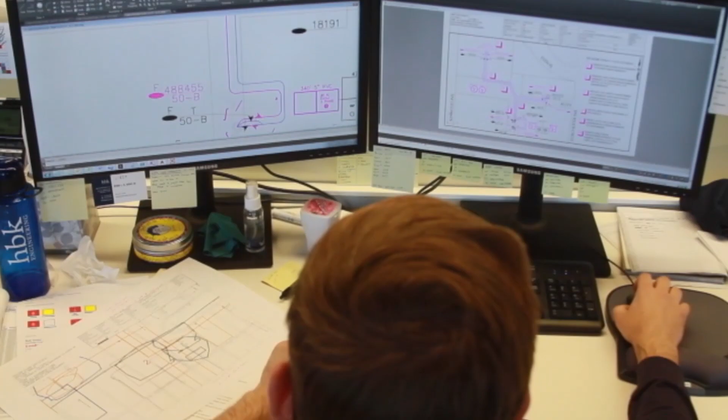Nobody can prevent damages on their own. In every step of the design, installation, protection, and maintenance of underground utilities, there are people working diligently and innovatively to reduce damages. All these people need and deserve to have their stories told, which is what we do here at Planet Underground TV.

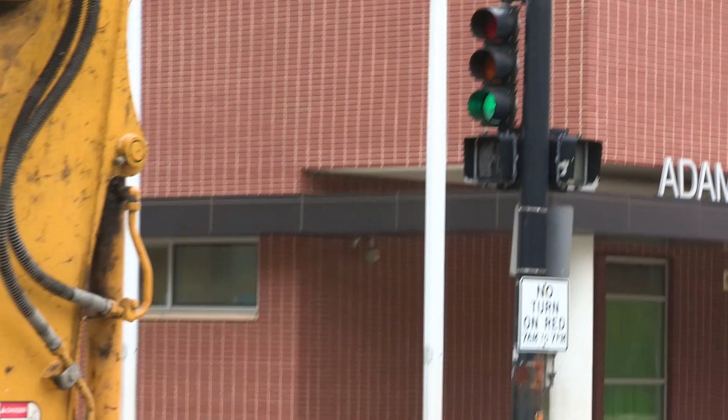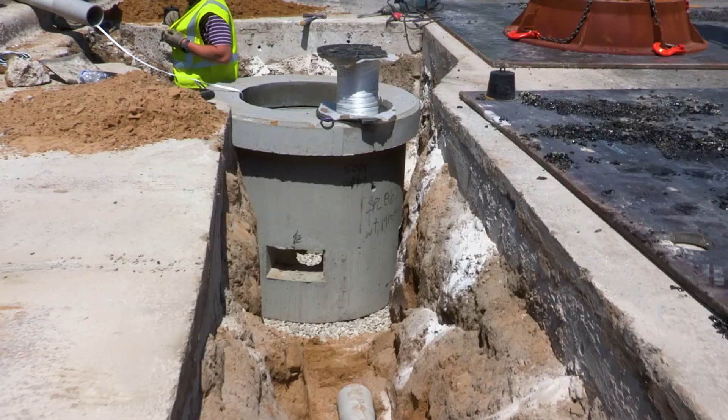We're out here at 75th and South Shore Drive. We're doing some trenching. We're going around some fire hydrants that needed to be avoided for the bore shot, so our trench involves going out in the South Shore. So we saw cut yesterday, and today we're actually digging all the road. My pipe's getting stubbed under the curb line where they're actually going to be doing some bore shots, our 1 4-inch pipe that we're putting in.

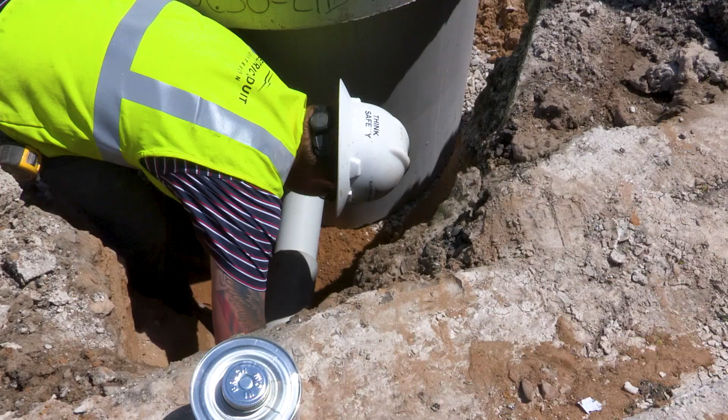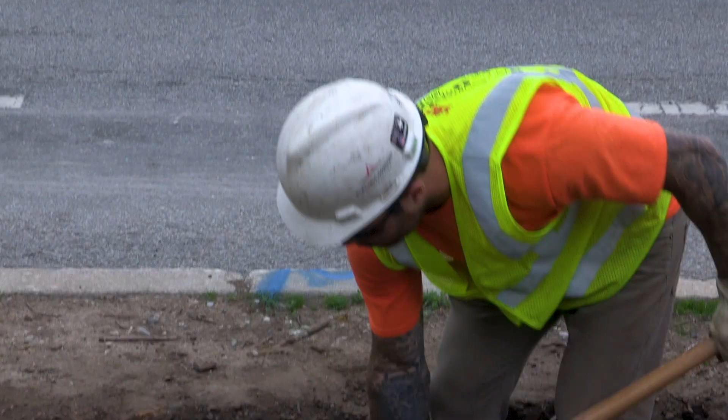So I'll stub my pipe into a pit for the bore crew, and the bore crews will come out and drill theirs in and eventually tie into ours. With the drilling though, they have a lot of potholing to do due to the water services going to all the residents here. And they will be potholing every water service that the drill crew will be drilling either under or over, depending on the depth of those water services.

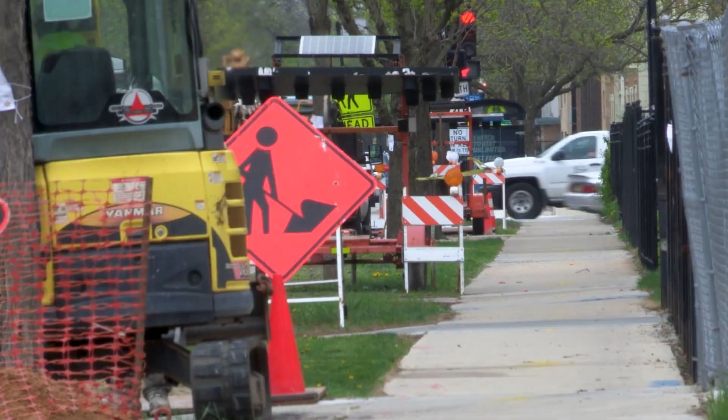So this job is for small cell nodes. There's actually a pole that was put up a few weeks ago by one of our local 9 crews at 74th Street, which is right over here. And our conduit will end up connecting into that pole for the small cell nodes, actually running all the way from 72nd all the way down to 76th, I believe. But there are numerous poles that went in for new small cell nodes and numerous manholes for the fiber build.

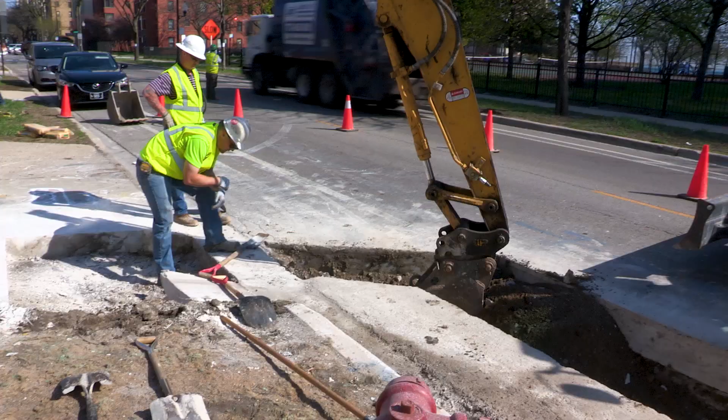So basically, when there is trenching and boring within a job, our goal is to get the trenching crew out first so then they can open up what we call pits for the bore crews. So then the bore crews don't have to waste their time with that. So we'll stagger the bore crew behind. They'll already have their pits open.

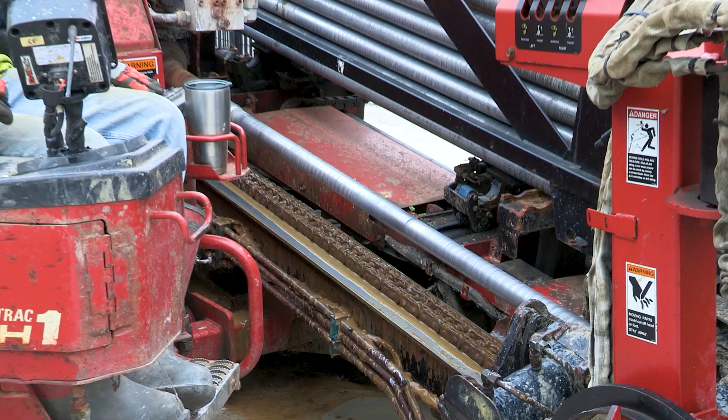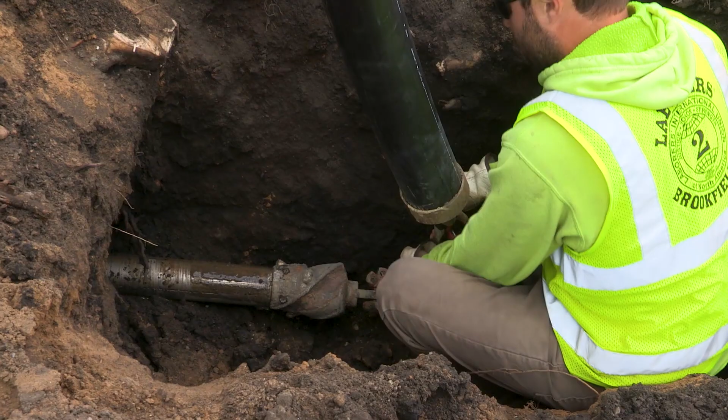They'll come in their first day, start potholing all the utilities and establish their running line, and then they'll start boring. And then once they get to their next pit, we'll have the conduit or poly waiting for them to pull in, and they'll tie into what the trenching has already put in. Our trenching uses Schedule 40 PVC, it's straight sticks. The boring operation uses reels of poly.

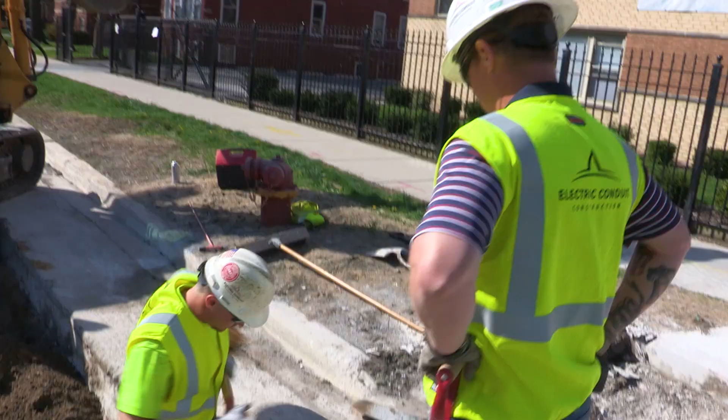Then after we get that done, we'll typically put a 4-inch in for fiber, and then we'll have a crew come back. They'll install innerduct, which is 2 1.25 inches, 1 1-inch, and our clients will then have us pull fiber in through one of those IDs, leaving the other 2 for future use. And then if the site requires power, we'll also install the power. For the most part, it's 2-inch. If it gets to a larger run, it'll be 4-inch, and that's what rises up to the poles.

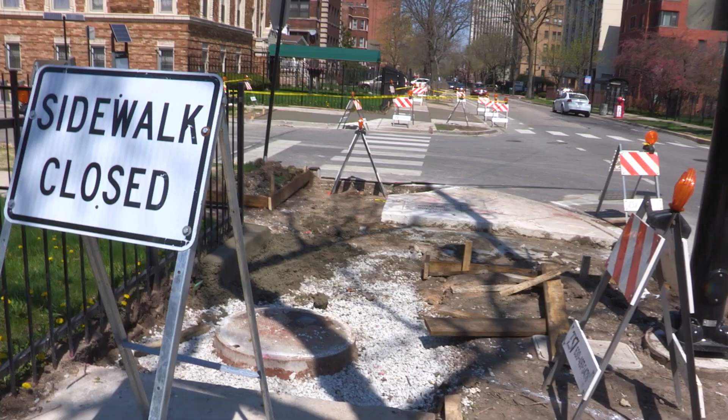We'll have another crew come in, we'll take the pole out, and per CDOT, we have to install a new pole. They're engineered to hold the equipment, and we'll install the foundation. We'll have to come back after 2 days. We'll put the pole up. Once everything gets ran, the power, the fiber optics, then that's when we'll go back and install the equipment.

HBK has been designing small cell wireless nodes now for over 10 years, but we've definitely seen an increase of that type of design in the last 2 to 3 years, and it's even picking up more now with discussions about 4G now transitioning into 5G. What that generally means to us is that there'll be more sites that are closer spaced together. In other words, representing smaller umbrellas of wireless coverage in the 5G schema versus the 4G schema.

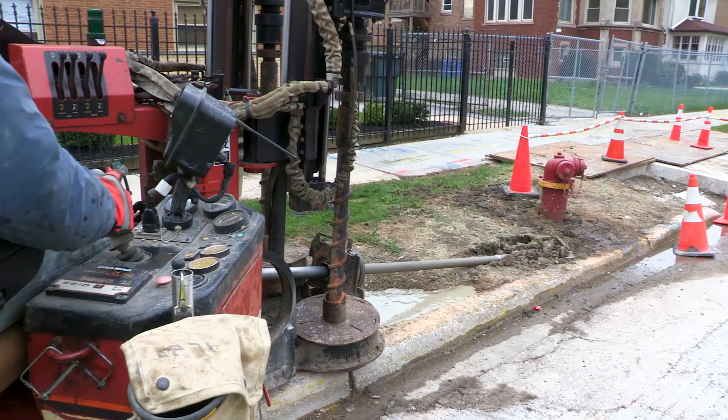For us, there's a number of challenges that we have to balance for the communications providers when we do our designs, to keep the installations efficient, to keep costs down, and to get the design through OUC coordination process. And then when we're running our alignments for the fiber or power connections that lead up to that pole, we're also having to balance our positioning in the roadway versus where the utilities that run along the curb are, for 2 reasons. One, we have to maintain the clearances on the utility off the curb,

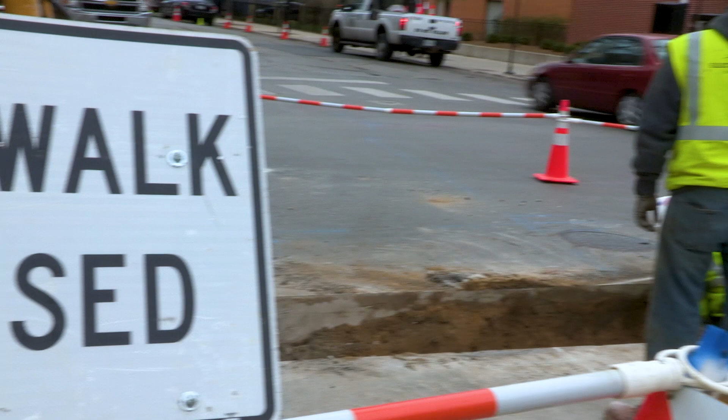but we also have to, again, try to be mindful of the amount of pavement restoration that we're committing that communications provider to by placing that line further out into the roadway and impacting possibly more than one lane of traffic, or getting into 2 lanes of traffic, or crossing those lanes, and then committing that communications provider to half-width paving restoration, or possibly even a full-width paving restoration.

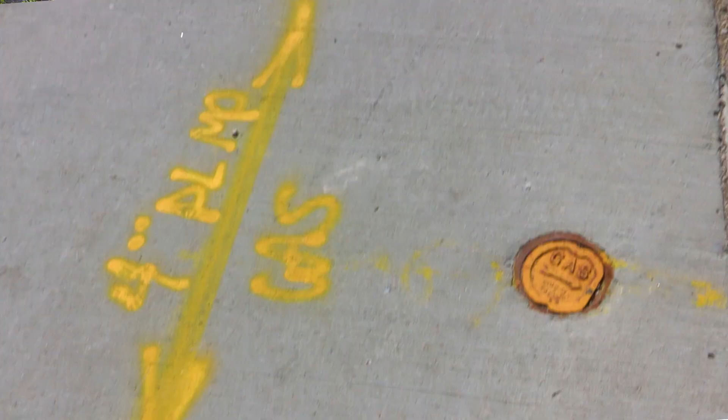So there's a lot to balance in terms of getting that installation done efficiently and smoothly. When I showed up on site, the job was white lined and all my locates were here. I haven't been on a job since I've worked here that hasn't been white lined. And the JULIEs are usually always there, or the DIGGER is always there.

The foreman is responsible for checking his permit and his DIGGER ticket to make sure when he shows up on site that he has a valid DIGGER ticket. If you don't have a valid DIGGER ticket, you can't put a saw in the ground, you can't put a shovel in the ground, nothing without that valid ticket from DIGGER or 811 JULIE.

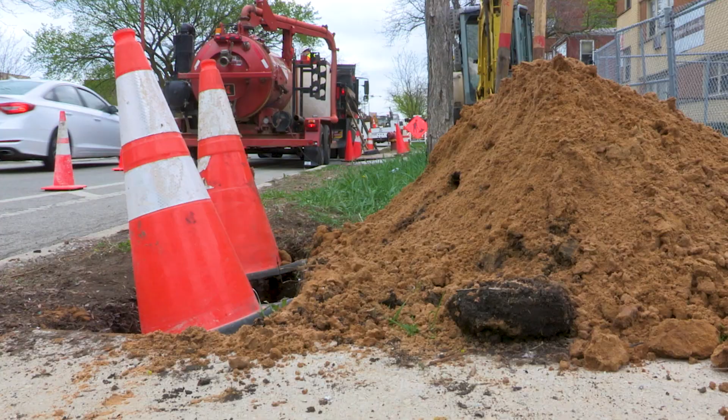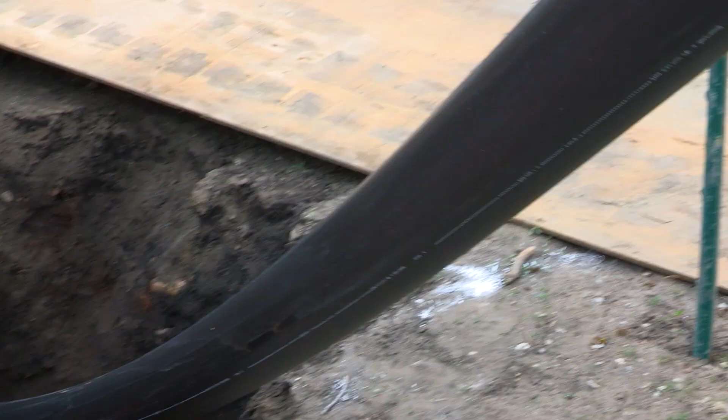The bore crew, once they get their pipe in, my pipe is stubbed on each side. They'll have pits there. After their drill shot is in, they'll connect the 4-inch pipe that they drilled in to my conduit that we stubbed.

So in addition to our engineering and design, we're also a utility locator, and white lining to us is a critical component, and it's also a critical component to the excavator. An excavator or a utility that white lines their proposed installation, I would say, is almost guaranteed to get a better, more focused and precise locate that's relevant to the work that they're going to do, versus the locator going out and having to make educated guesses about where they really should put their focus. So not only is it a time saver for us, but it also allows our locator to put more attention to where it's needed.

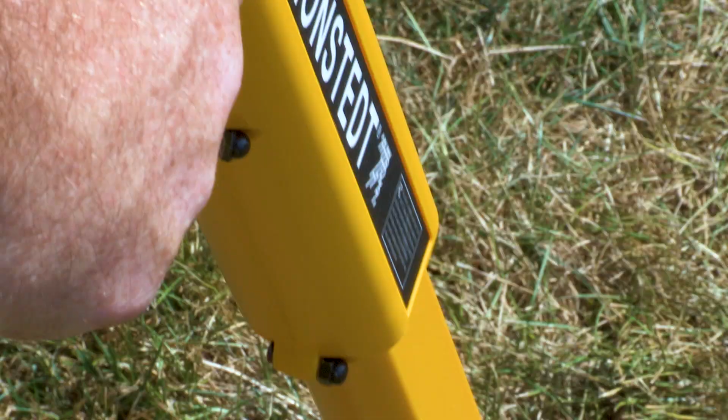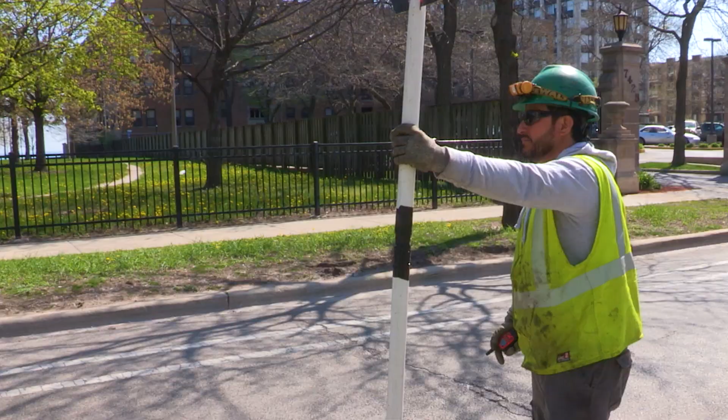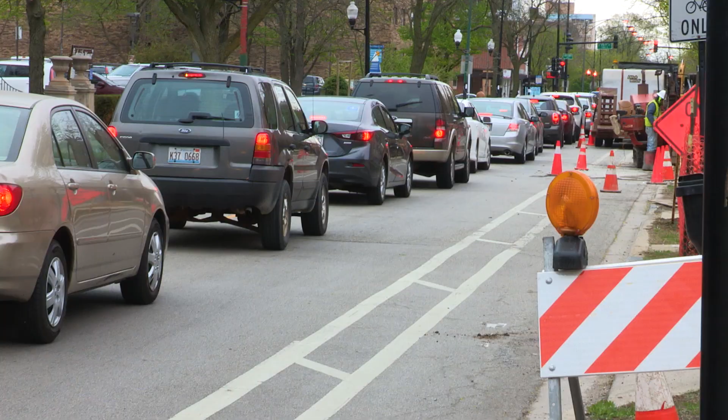With South Shore being such a tight street, we are utilizing flaggers today because we have to bring it down to one lane. Not the ideal circumstances for digging, but it is the city and you do have to do that sometimes. So as you can see on this job, traffic is always going to be a big hazard. Basically anywhere we go in the city, our number one concern is traffic and pedestrians. It's hard to keep your site secure when you've got constant flow back and forth in every direction.

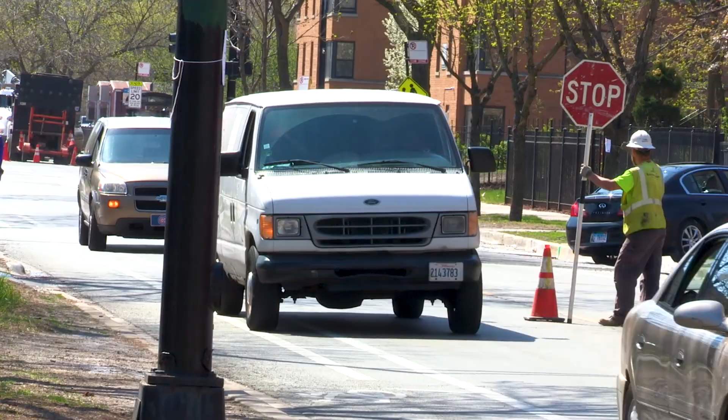We have flaggers out here today, as you can see. They're keeping things flowing through this job site as best they can, but even still, if somebody's not paying attention, we're basically at the mercy of what their action is. So they need to stop, they need to be paying attention, otherwise the result could be catastrophic.

Being a flagger, a lot of people don't understand. They see somebody standing out there all day and they think that it's an easy job. It's really not an easy job, having to be engaged for that entire day and paying attention constantly to what's going on around you. A lot of people see them out there holding a sign, and that's not all it is. They're in constant communication with each other, using walkie-talkies to let each other know when they're letting a lane of traffic go.

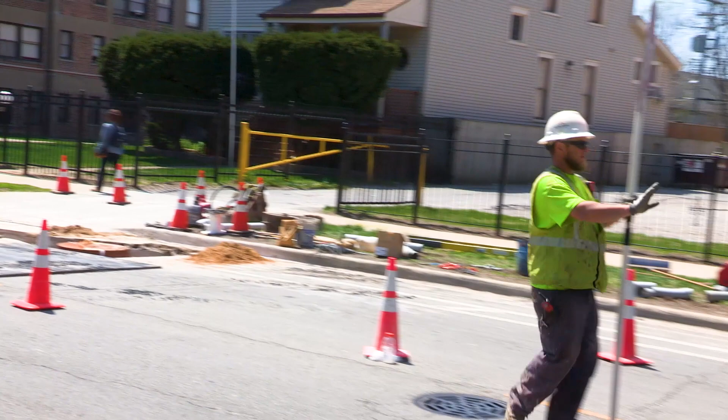And all of our flaggers are certified through a flagger class. A lot of them take it through their local union halls, but they have to provide documentation to us before we let them operate a paddle for us. So as you can see, these guys are doing a great job keeping traffic moving through here, and if they're not paying attention, they could run traffic right into each other. So it's a very important job. It's not as easy as everyone would think.

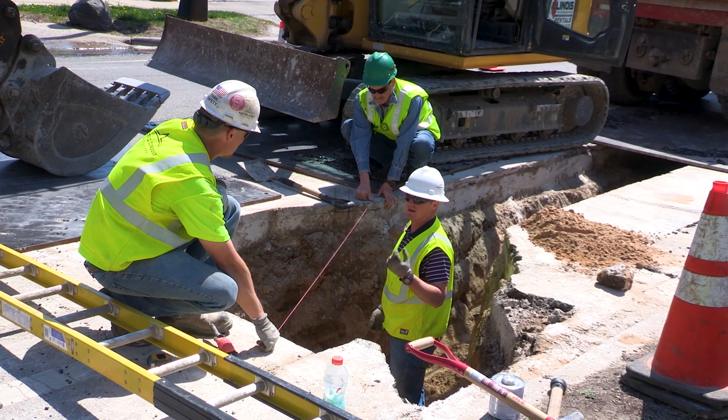We spend a lot of time and resources on training before we send guys out to the field. They have to be aware of all of our expectations, and we do expect a lot from our guys, especially when it comes to underground digging. We've got utilities in the ground. Everybody has to be fully aware of the procedure in place. We use the rules to dig by that ComEd has provided us, and that goes a long way.

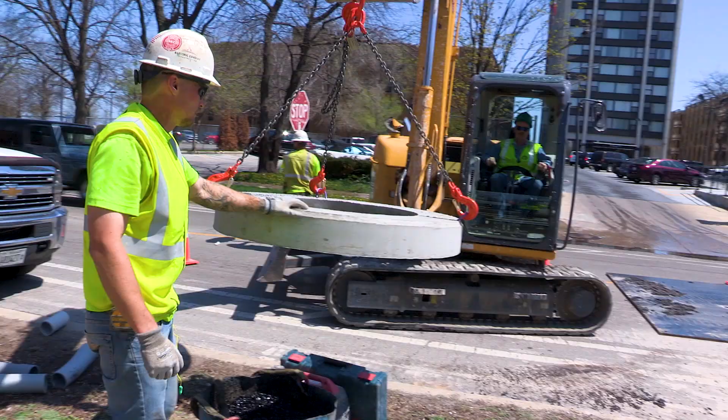They say if you follow your rules to dig by, 99.9% of the time you're not going to be found at fault if you have a utility strike. We've empowered our employees to take the right actions when they're digging in the city, especially.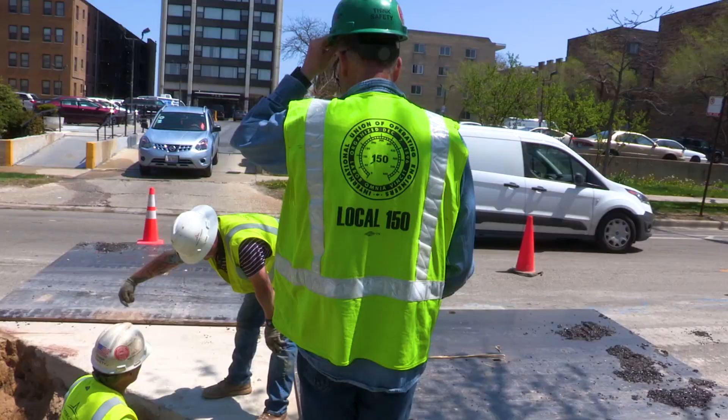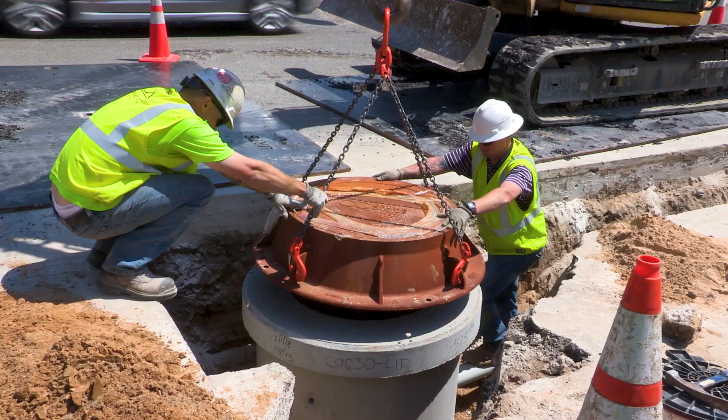Every bucket we take very carefully, because we know that if we hit something, whether it's marked or unmarked, it's still going to cost the company money, it's still going to slow the job down, it's still going to make us less profitable in the long run. So we've recognized that, and that's why we train our guys, that's why we take it to the next level, because we really want them to avoid every utility strike and keep it rolling. If we can keep the job flowing and everything going smoothly, then obviously that's the way to go.

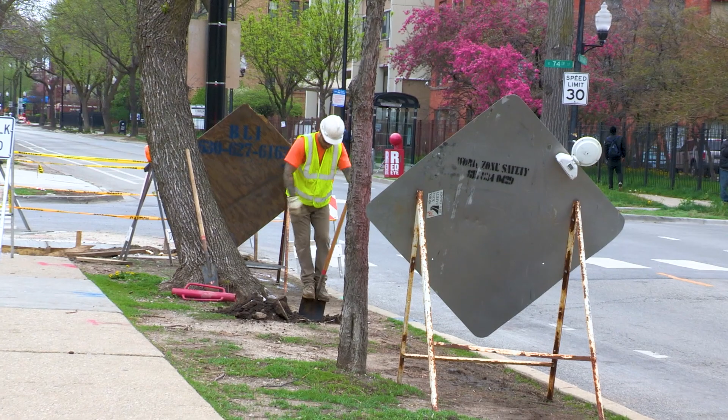The biggest safety aspect: no one has X-ray vision in the ground, so we're really reliant on the locators locating correctly and not missing utilities. The biggest cause for concern with underground work is mislocates, which could be anywhere from electrical, gas, fiber optics. There's immediate dangers to us with the electrical and gas for obvious reasons, but then there's also, if you knock out a fiber optic, you could be knocking out someone's home. They no longer have phone service to call 911 if needed, or you're shutting down someone who absolutely needs that cable line up.

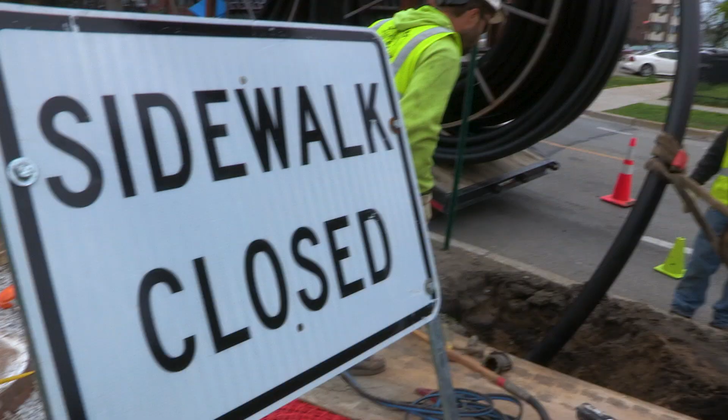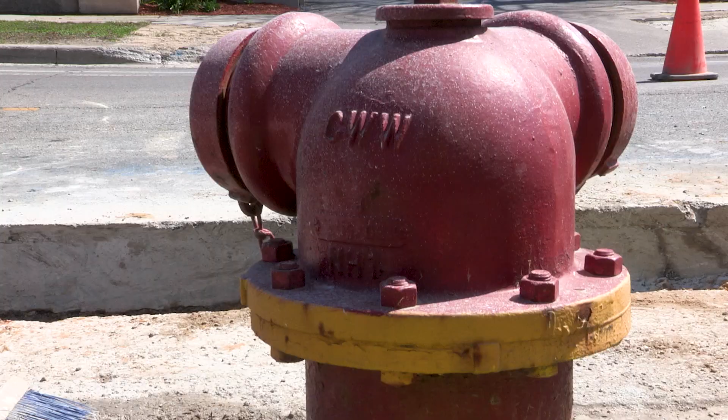So yeah, per the drawing of the engineers, we saw cut yesterday, and our trench comes out, and as you can see, it goes around a fire hydrant because the drill crew wouldn't be able to drill through there. So that's why they had us come out in the South Shore, and we broke and dug in the road to avoid that hydrant.

Another challenge that we work around when we're doing our designs is that while we've put our clients into the best possible alignment, minimizing restoration and minimizing potential utility conflicts, we also have to try to avoid putting them into construction-intensive activities, such as increasing the depth of excavation to get under things, or actually putting them in a scenario where they have to perform utility support, either of water mains or gas mains, that could involve countersinking I-beams or elaborate straps and things that really just take a lot of time, can take a lot of engineering review, and then a lot of on-site watch and protect support on the behalf of the utility.

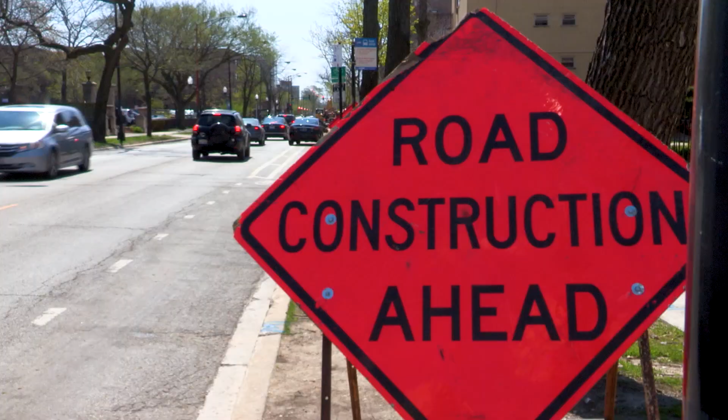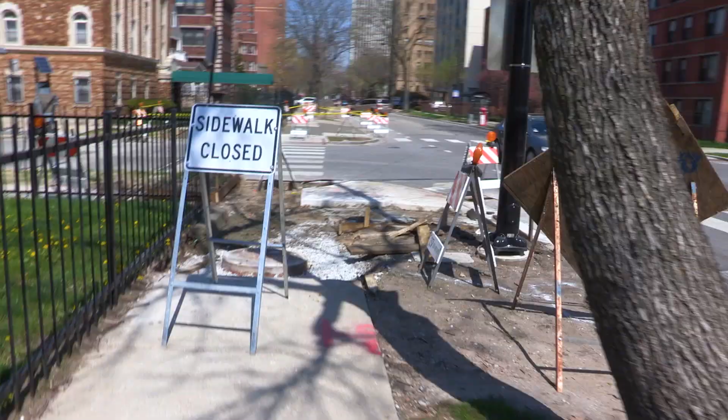So those things can range from anything from minimizing restoration. Usually we are going to city light poles that are on sidewalks at intersections, and so we're coming in connection with the ADA ramps, and when we impact those ADA ramps, they can be expensive to replace, and that's a cost that comes back to the communications providers. So what we do is we really try to strategize our designs to minimize that as much as we possibly can.

A box of support is when, say, the water or sewer is going underneath your existing utility. You have to expose your utility and actually support it, so when they're going underneath, it doesn't break or collapse or anything like that. And then a watch and protect is simply when you're on site while they're doing the work, you're there in case something happens, so we can be there to take care of the utility that we're protecting.

One thing that's an issue is that one company will have what's called an OUC review. You have to have an OUC review in order to get the permit for your drawings. So company A will get OUC review on their job, say a month or two ahead of time of the other company. So that utility is not in the ground when that second company gets their approval. So when we go to do the job, there's already another utility in that existing run. Actually, we just ran into a job up at Sheffield and Diversey that had that exact thing happen, where one company had already taken the running line and nobody knew because it wasn't on our OUC approved prints because it was so new.

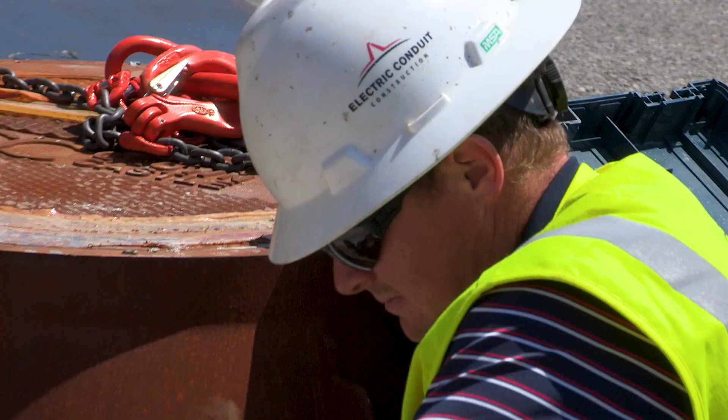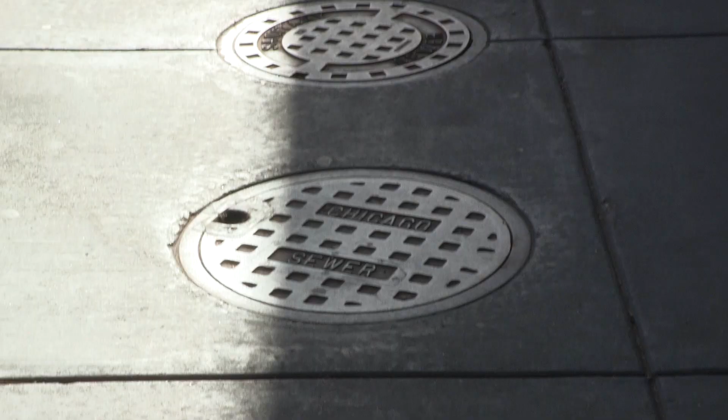Over the last couple of years, and especially now, we're seeing a rapid increase in the amount of new utilities that are being installed, even away from our downtown area and out into the neighborhoods. Such that we're all designing and excavating kind of right on top of each other, and that's not only limited to communications, but that's also water main replacements and gas main replacements, and the power utility working through their rehabilitation programs.

So the OUC plays a really critical role in bringing us together as a community and facilitating the conversation that we're all having with each other. However, we can't stress enough the amount of coordination that is needed for us to be able to communicate, okay, we're designing at this location, and for another company to be able to receive that information and give back to us what they're doing, so that we can start to say, all right, I'm showing B company's proposed facilities and C company's proposed facilities in alignment with ours, so that we are starting to reflect those plans and bring all of that picture together, so that the excavators continue to know what to expect when they go out to the field and begin their projects.

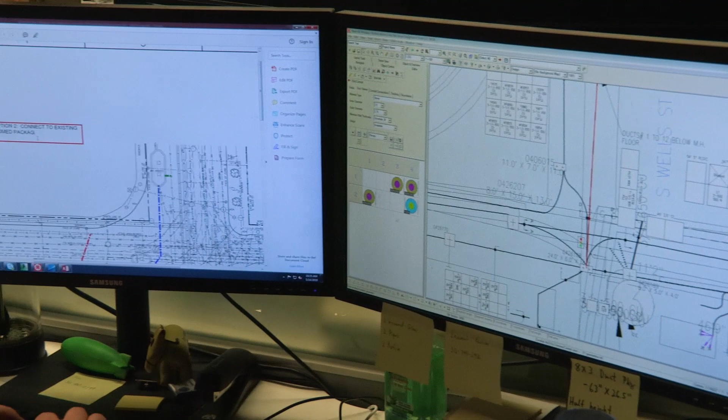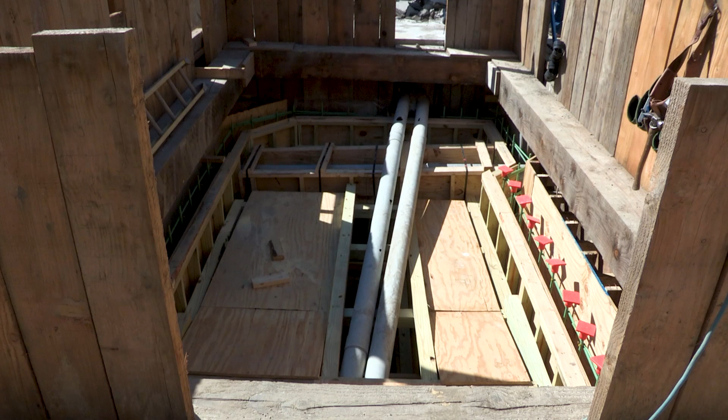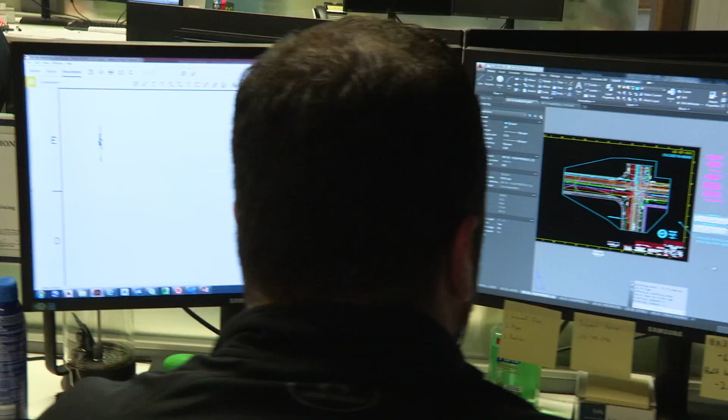So many different companies are working quickly to deploy wireless facilities, and that raises a new challenge for us, and that is that as we design fiber and power to targets to mount a new DAS node, we have to consider that a lot of other companies are also trying to get to those same facilities. So the need for coordination is really important. It may mean that we're designing something in parallel with another entity that's designing something else, and we have to coordinate closely with them to try and ensure that our proposed facilities are shown along with their proposed facilities, and that we're not impacting each other. So in other words, we're looking for things on our designs that may not even necessarily exist yet.

So a few extra things that we do and we provide and make available to our guys are the 8:15 morning call every day. Every crew is on the call. We're talking about what we saw the day before. So whether it be a utility hit, a property damage, any kind of personal injuries, we'll go through it, we'll talk about it, we'll analyze it, and we'll just get the word out to the rest of the crew so that they're aware of it, and hopefully they can apply that knowledge to their next day's work, and they'll be able to avoid things like that.

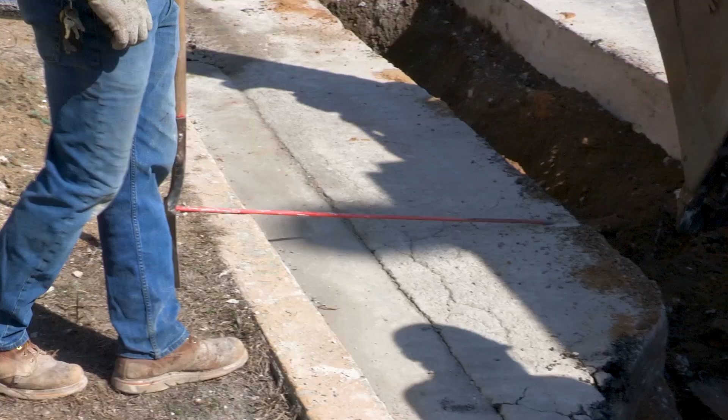So as you guys can see, we just found a pipe, unidentified, completely unmarked. We don't know what it is. It's about a 2-inch steel pipe that we just found in the ground while we were digging. They were digging slowly. They found it, they stopped, they dug down, they identified it, and now they were able to avoid obviously damaging the utility. And yeah, that'll be addressed tomorrow on the morning call. The foreman will usually read that out and just let us know what happened and what they did to avoid it and how they remedied the situation.

We also have goodsafetycatch.com, which we encourage our guys to use. If they don't feel comfortable talking on the call for whatever reason, they can go online to goodsafetycatch.com and submit to a website and basically describe what they saw, what the good catch was. And then we have an incentive program for those guys. We reward them. We give them some kind of Electric Conduit swag, whether it be a hoodie or a t-shirt or something they can use in the field.

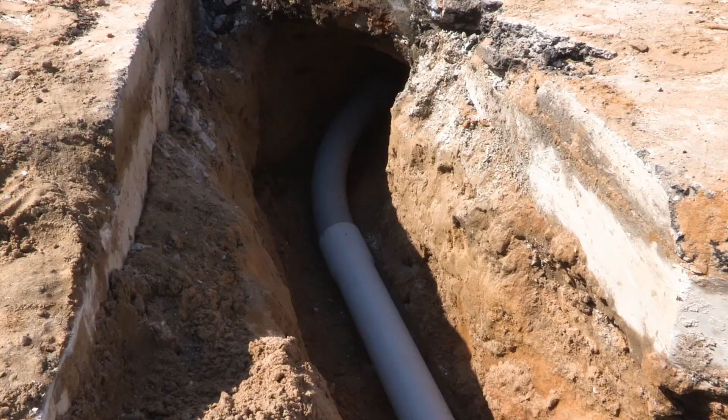In one of the trenches that we dug, we did have an unmarked abandoned gas, which shows on a print that I have, but it's not located. You just know that there's an abandoned gas somewhere. You don't know if it's going to be in your trench or if it's not going to be in your trench. It was in our trench. We found it. There was no damage to the abandoned gas, but yes, there was an abandoned unmarked gas main.

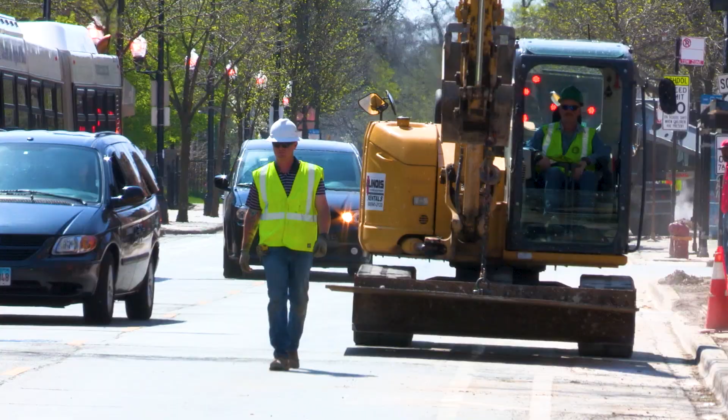So as a foreman, running into unmarked and abandoned gas mains, abandoned old water services that don't get marked, it becomes a big challenge, especially digging in the city with a lot of ground that's not very good ground, where you're digging through a lot of rock, asphalt, old concrete that shows up in your trenches. And with having all those abandoned lines in there, it makes it very difficult for you to do your job and get your job done efficiently and actually have production and footage, because you want to be safe.

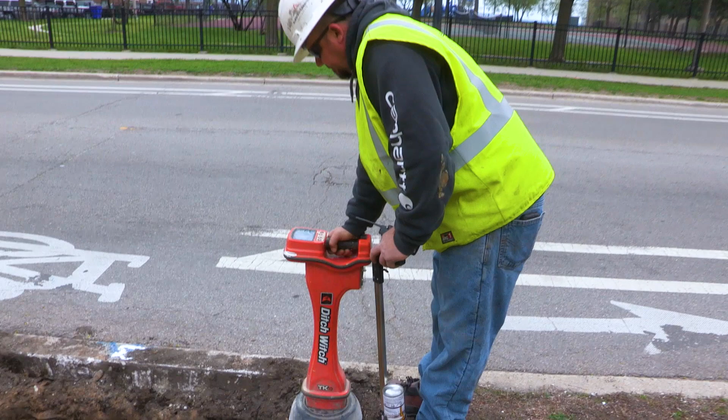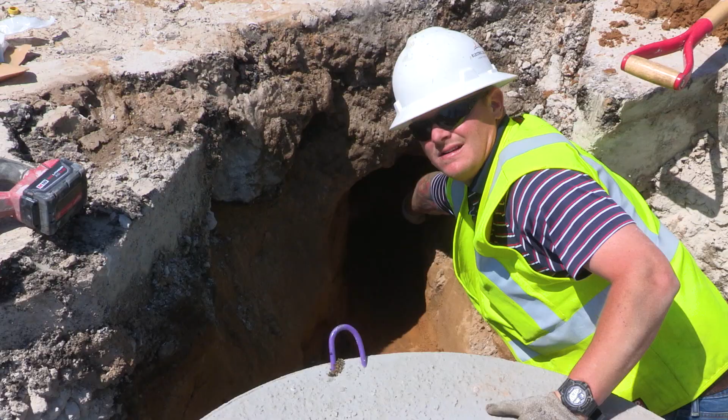You don't want to hit that because you don't know that maybe it isn't abandoned, maybe it's just unmarked and the locator missed it that day because he was having a bad day. But you find so many times and so many times again that it's abandoned, it's dead. You call USIC out and they say no, that's abandoned, it's dead. It happens on a daily basis with any crew that's digging in the city. You come across abandoned and unmarked utilities.

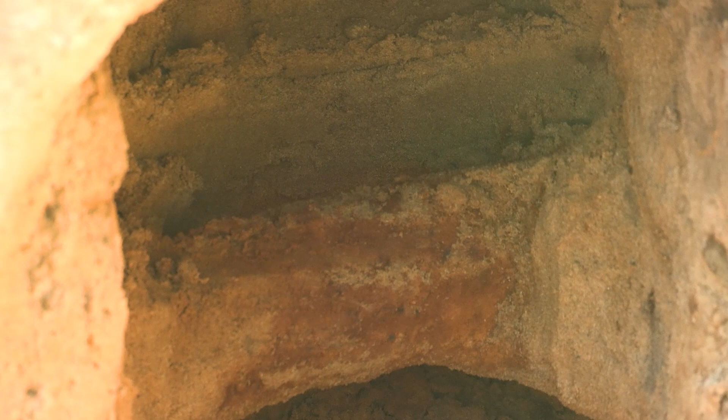I think that there should be something done to identify that there are abandoned utilities in the ground, and maybe if that person who's putting in the new utility takes out the old utility, that could alleviate a lot of problems.

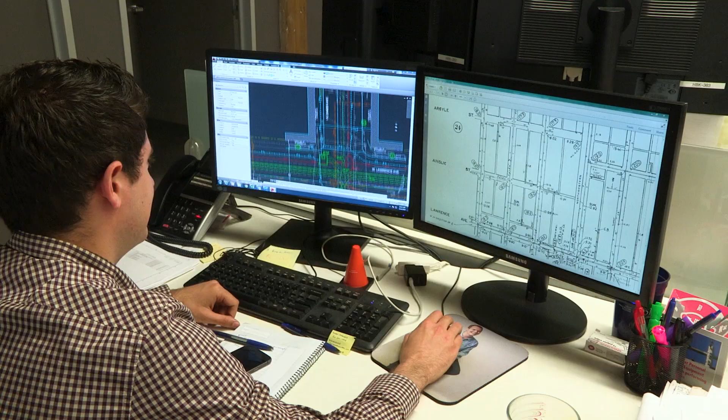Abandoned utilities is a topic that's been evolving over the last 10 years or so. Utilities in the past always showed their abandoned lines on their atlases. When they would decommission a line, they would basically add a tag to it that says either it's dead or abandoned, and then as they provided those atlases back out for our designs, we would indicate that on our plans. In about the past decade, they've started to change that practice and remove those abandoned indicators from their atlases so that they wouldn't show that facility any longer.

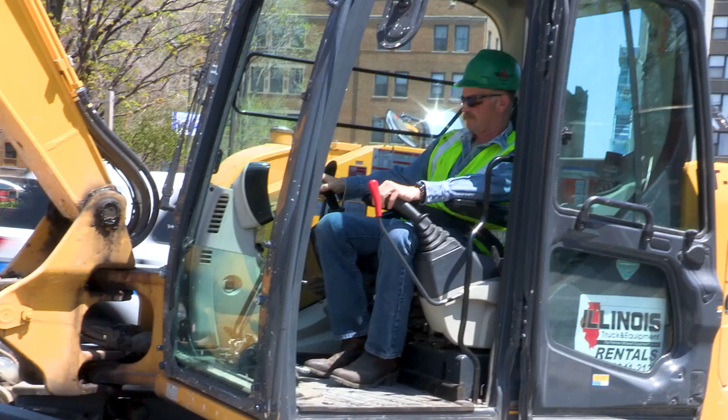Even as of late, they're requesting that we no longer portray abandoned lines or depict them on our designs, and that's really for the purpose of minimizing the potential for confusion in the field that an excavator might have if he questions, is that alive or is that abandoned? We always recommend taking a questioning attitude in the field, whether we believe something to be abandoned or alive, and we believe that adding that abandoned facility on there does represent a clue as to what that pipe may be when they come across it.

However, we follow the general wishes of the utility, and we remove those lines from there and make the recommendation that the excavators really continue to have that questioning attitude about the utilities that they're coming across.

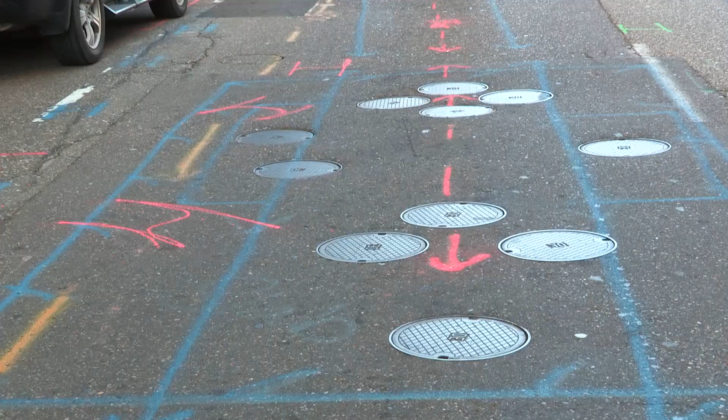Yeah, I'd prefer that when you put in something new, you have to remove your old utility, but the only thing that's truly in place is for sanitary sewer. You either have to wreck that out or you have to concrete fill it for safety reasons, sanitary. But I mean, it would make it a whole lot better. These streets in Chicago are starting to get really congested, and the locators don't differentiate between abandoned utilities and new utilities, so it slows us down with the fact that we have to pothole every single one of them, whether or not they're live.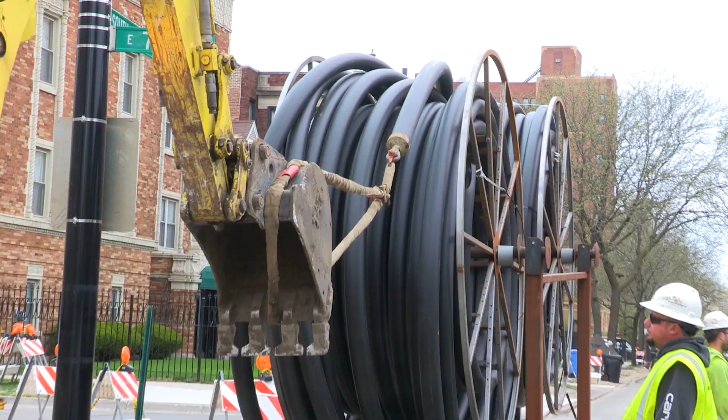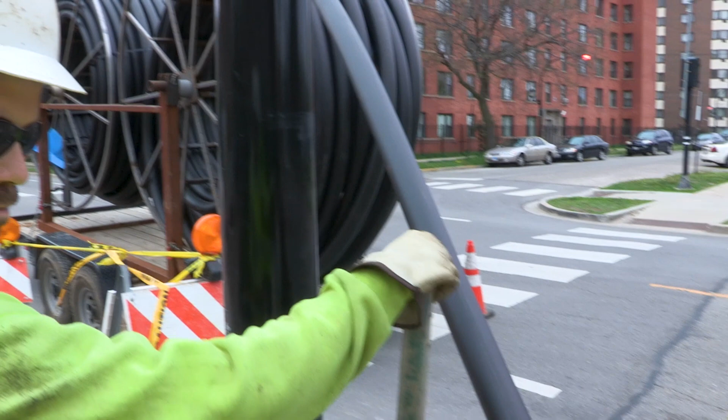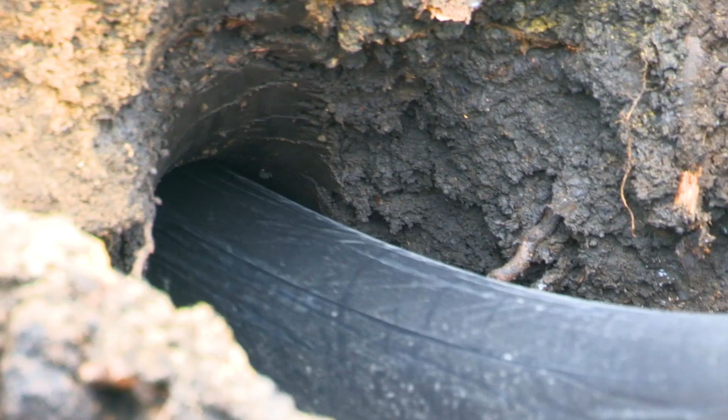This type of construction, this utility type of construction, this fiber optics and small cell, it plays a big part in all of your internet. It's making everything run faster, and everything is getting faster. So this work is continuous because the broadband is getting faster, and everything is getting more high speed. It's going from 4G to 5G now. So everyone needs to keep updating and updating. It's a big part of technology and how I think the world's running now.

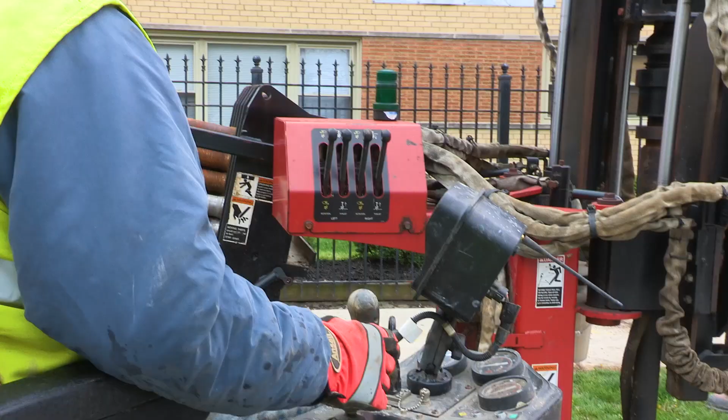What we've seen in the past is that there weren't many utilities outside of the big four of AT&T and Peoples Gas and ComEd and water management. There weren't many of the other telecom providers out in the neighborhoods away from the central business district of the city. Now with the increase in the small cell wireless, a lot of those companies are starting to move and place facilities out in those areas, which now means that our job has increased in terms of challenge of identifying where all those utilities are when we're proposing a new directional bore that would be in close proximity to where another provider may have installed their facilities in the past.

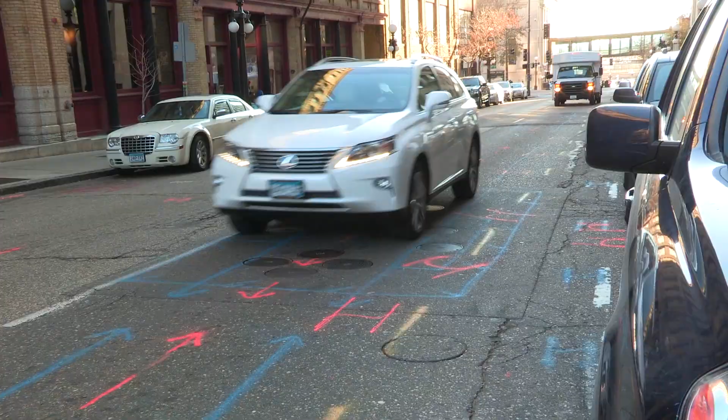In terms of the utility congestion in the areas where we do these, and we generally do run into this more in the city than we would in a suburban area, we try to visualize, especially in a directional boring design, all the utility crossings and utilities that might be in parallel to our proposed installation as much as possible in the design. And at that point we would actually indicate an area on the design communicating to the excavator that that's an area that they should test hole for confirmation.

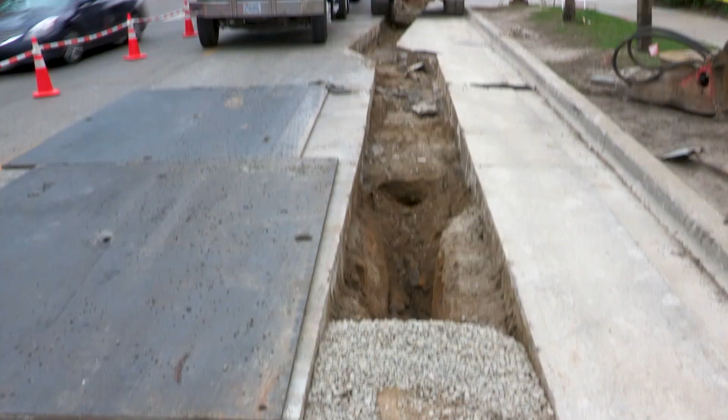Basically what we've got going on is we're trenching all down here and installing fiber optic and power. What that does is basically our cell sites that we install on the street lights or traffic light poles, we install a fiber panel and a power panel.

So we bring the fiber and the power up there. Then after the fact we get our equipment up, we will then install what we call a cell site, which is basically an antenna sending out the signal for cell phones.

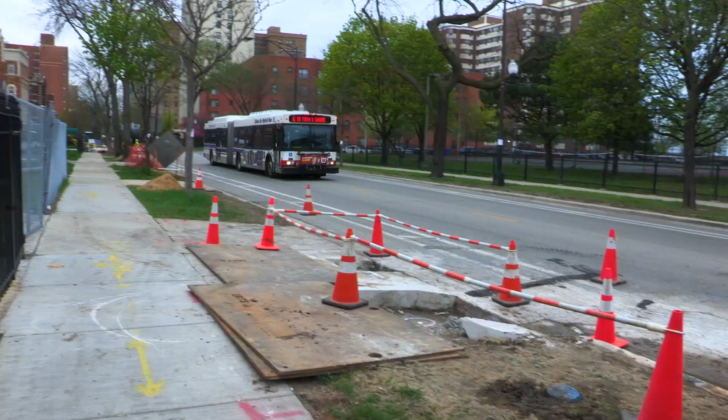So for Lollapalooza, obviously it brings in a very large crowd and the cell service gets congested. So what one of the cell phone providers did is they hired us to go in there and put these cell sites up. So every one of their users had service within Lollapalooza and no other providers did. That's the exact same thing we're doing.

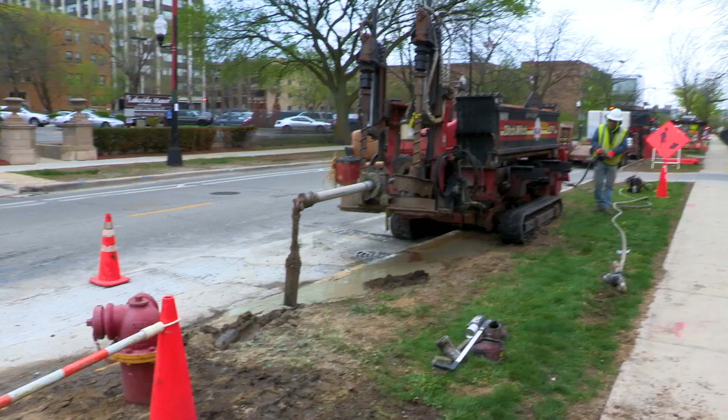We're installing fiber optics, but for the most part the fiber optics aren't actually going towards cable or internet to homes. It solely is for providing cell phone service. The areas around here no longer provide cell towers or even putting cells on buildings, which used to be popular too a few years ago. And this is their new method in order to get wider range among their customers.

For the most part, the cell service providers are the ones putting out the most work right now, but there still are other fiber providers and companies that everybody's familiar with, Comcast, AT&T, that are also putting everything in the ground as well. We do that work, but this is our primary work here.

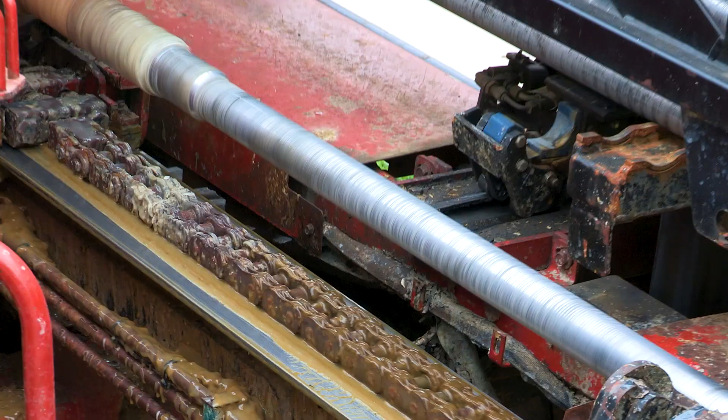Currently right now the biggest money savings for a lot of the clients, and it's a big push, is the boring. Two years ago, you really didn't see boring in the city of Chicago, up until companies started pushing for it. And now the next big push is that they don't want to restore the ADA panels, which are the corner panels on the intersections.

So what they'll have us do is bore down the sidewalk, and then instead of trenching through the ADAs, they'll make us do a horseshoe around the ADAs in order to avoid that, which, for most people who aren't familiar, adds a lot of 90s to the job, which makes the back end of the job, when we're trying to pull in the wire and pull in the ID, much more difficult.

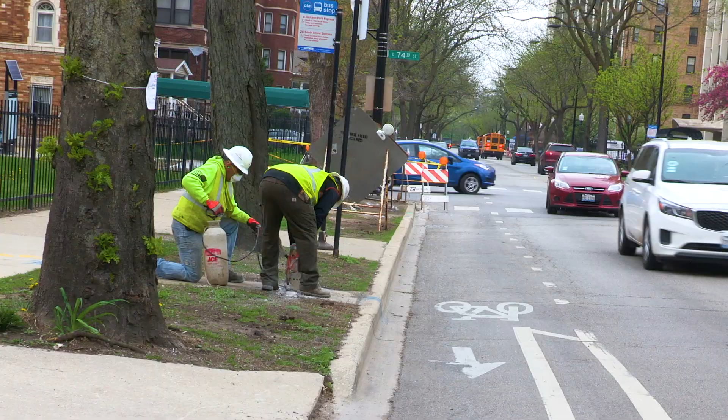So directional boring has typically been discouraged in a lot of parts of the city just due to the fact that damages can occur easier while you're directional boring than they can in open cut excavating. With the increase in deployment of small cell wireless nodes around the city over the years, a lot of that directional boring has increased, as so much of this goes in adjacent to the curb or in the parkway, leading up to poles that are already on the sidewalk or in the parkway space.

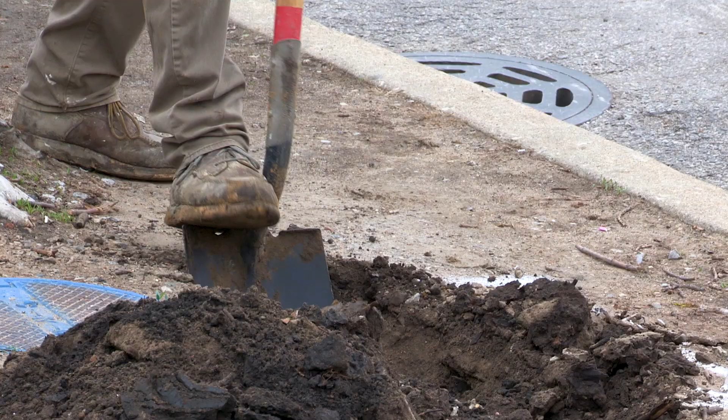What that does mean, though, is a higher level of due diligence has to be performed prior to the drilling to identify where those services are, where those utilities are, in addition to the potholing. And that really helps the excavator get out and find those clues before they're on site.

We're able to provide a turnkey project where a lot of companies are not, from putting the pipe in the ground, pulling the fiber, pulling the electrical, installing the poles, and installing the equipment. I mean, it's more of a roller coaster. It has its swings. It's boom and bust sometimes. It slows down a little bit with the dark fiber installation or the actual residential commercial, and then other times this is what picks up.

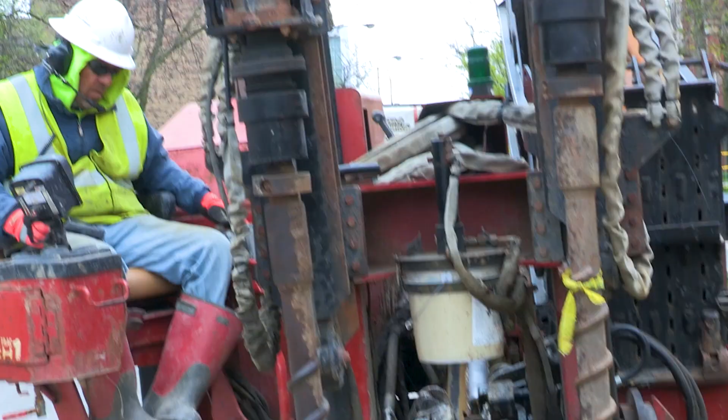Dark fiber is basically where a company will go in, they'll lay the infrastructure, they'll lay in the fiber, and then after the fact they'll sell it to somebody who wants it. I guess when people see what we do, they just assume that it's fiber optics or internet or cable that are actually going to the homes.

What they don't really understand is what we're doing is providing them a better cell phone service. Without this, there's really no other opportunity for these companies to provide a better range for these areas that can no longer have those cell towers anymore.

As a company who's spent our career trying to develop the best underground depiction we can, that gives the most accurate placement of utilities and tries to give the excavator the best picture possible in how they do their work, it's very critical that we come together now as a group of companies that are all designing at the same time and try to give those excavators and contractors the best picture possible of what they're going to encounter in the field, to ensure that they can maintain damage prevention, safety, and just general success of the projects.